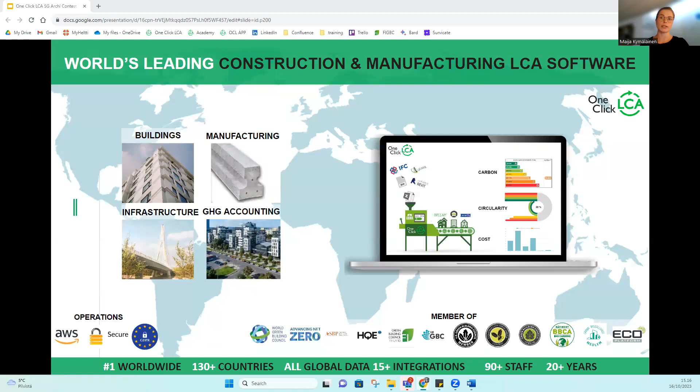We aim to connect the entire industry from engineers to architects, manufacturers, builders, investors, to institutions, to whom we provide a global platform for data and tools to make calculations in compliance to certification schemes and regulatory frameworks. One Click LCA is a global platform that supports over 60 different certifications and regulatory frameworks, and includes the world's largest data bank of construction materials with over 150,000 data sets.

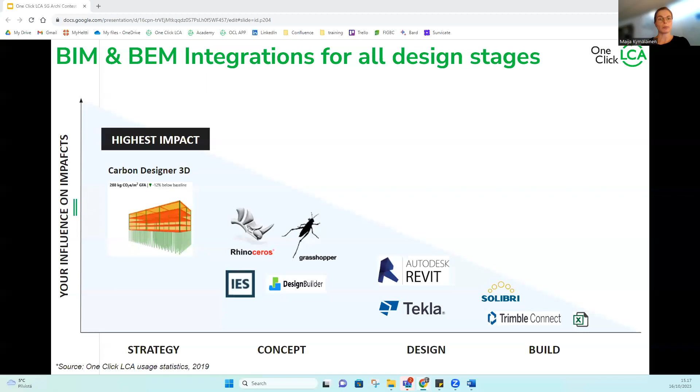We provide building information and building energy model integrations for all design stages. You can see some of our integrations shown here - maybe some of them you might have been using before.

Finally, One Click LCA provides free training for everyone interested. We provide reports, policy work, and research articles on meaningful matters. Lastly, we are a team of experts ready to support you in your journey to decarbonization.

Now we'll dive a bit deeper into today's agenda and continue with a look into climate change and the role of the construction industry.

The nationally determined goals, or NDCs, nationally determined contributions set under the Paris Agreement, are not even close to closing the gap to 2 degrees. But countries are off track to achieve even these globally insufficient NDCs. The current commitments by countries, as expressed in their unconditional and conditional NDCs for 2030, are estimated to reduce global emissions by 5 to 10% respectively compared to current policies, assuming full implementation.

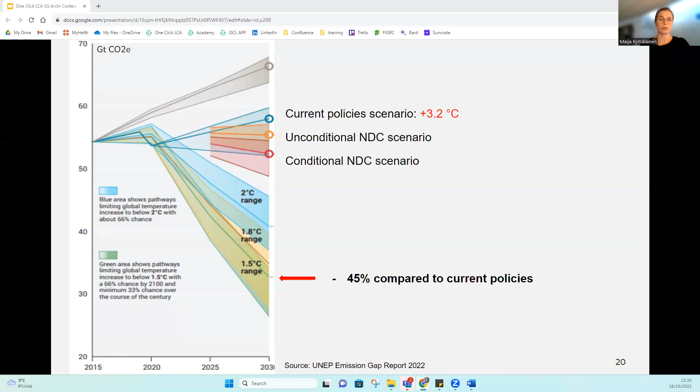To get on track for limiting global warming to below 2 degrees, and finally below 1.5 degrees, global greenhouse gas emissions must be reduced by 30 to 45% respectively compared with current policy projections. That is quite a big thing. Restricting global warming to 1.5 degrees requires approximately 35 gigatons of carbon dioxide equivalent of additional reduction measures. So this is no small feat.

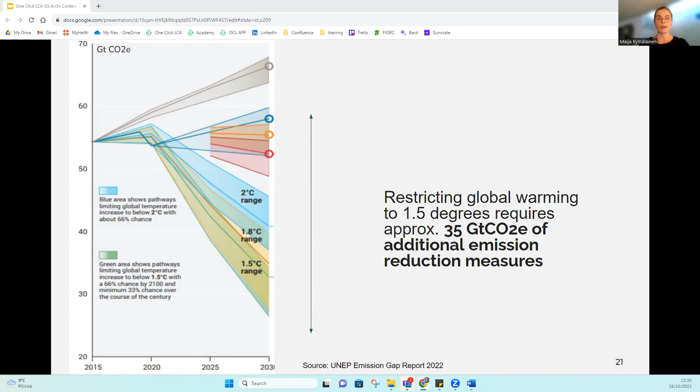In terms of the construction industry, buildings are responsible for nearly 40% of global carbon emissions. About three-quarters originate from operational emissions, while the remaining quarter is from materials and construction activities. This entails the embodied carbon we are going to talk about next.

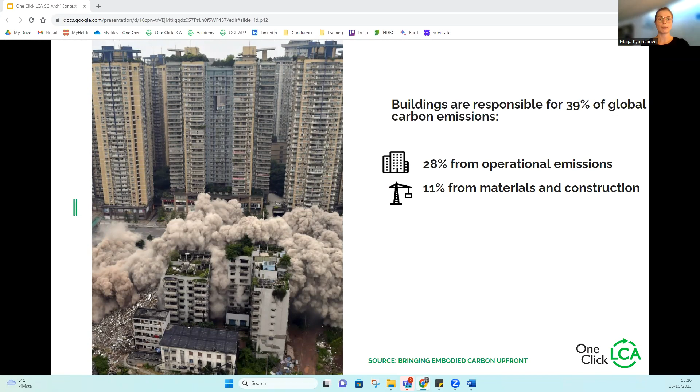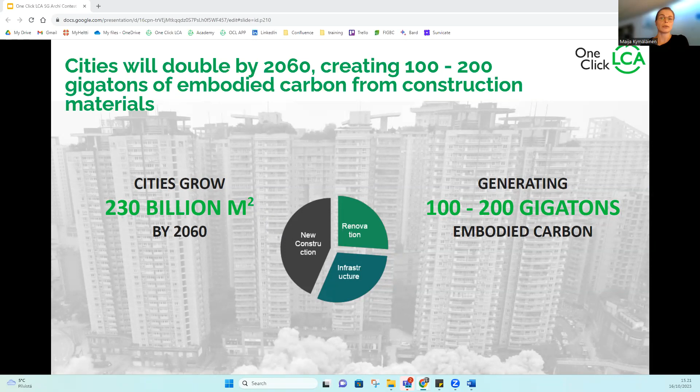Until 2060, the global population is expected to grow by nearly 3 billion people, and basically all of it is expected to happen in cities, meaning a huge amount of floor area needs to be built. It has been predicted that cities will double in the next 40 years, which will create up to 200 gigatons of embodied carbon from construction materials only. This means up to 3 years of global carbon emissions from materials alone, or in other words, building a New York City every month until 2060.

For this reason, the World Green Building Council has stated that we need to be cutting embodied carbon now. It follows that all construction needs to be operationally carbon neutral and create at least 40% less embodied carbon by 2030. So it is quite obvious that the construction industry needs to act fast.

Just a reminder: when we talk about embodied carbon, we mean the greenhouse gases embedded in the materials. These originate from material processing and manufacturing, transportation, the use of these materials, and the end-of-life processes as well.

If we look a bit closer at a building, we can see where the climate impacts mostly come from. This is an example building, a typical Finnish apartment building with 4 floors and a cellar, floor area of 3,000 square meters, assessed with the Finnish assessment methodology compliant with the EN 15978 standard, and calculated over 50 years of lifetime. These values are predominantly statistical averages from One Click LCA projects.

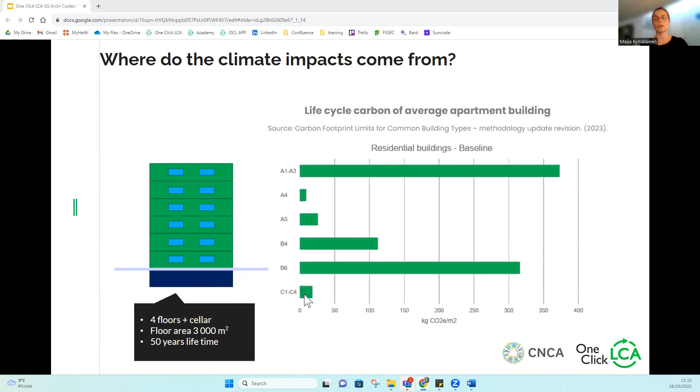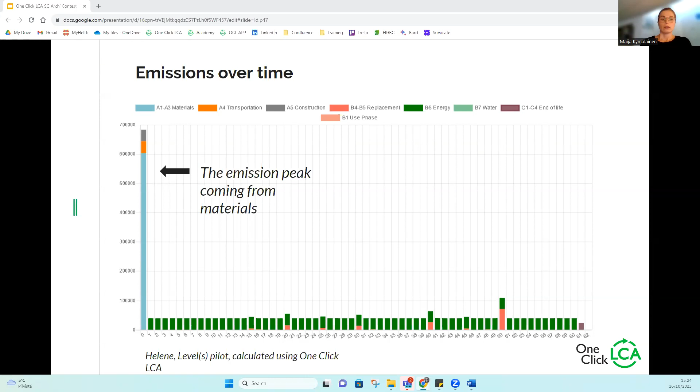We do know that the energy sector is actually decarbonizing. The share of renewable energy increases and fossil fuel use decreases, so the emissions from the energy sector are going to become smaller as time proceeds. But the emission peak coming from the materials remains unchanged.

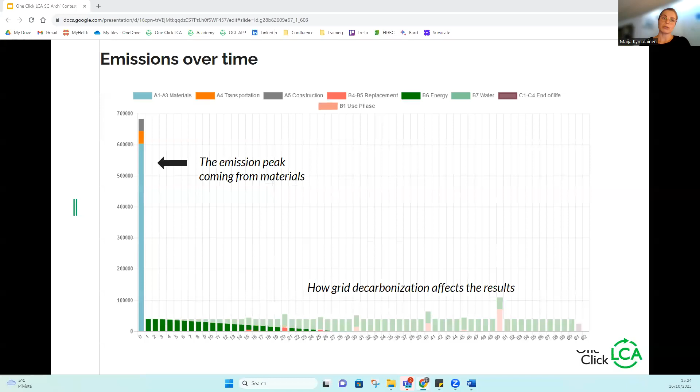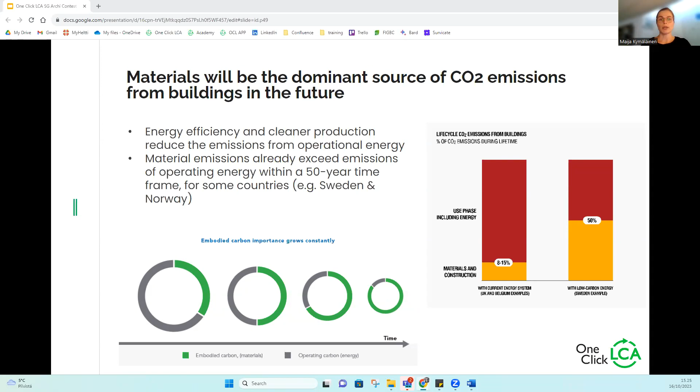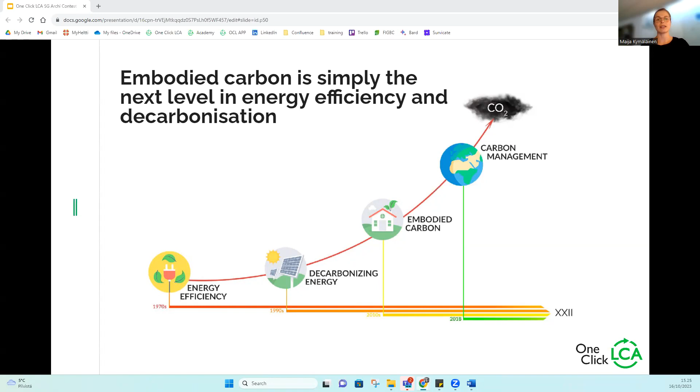So, for example, in Norway, where practically all electricity is generated by renewables, it would be hydro energy. So on the journey to holistic carbon management, embodied carbon is simply the next level in decarbonization.

And although we are getting ourselves deeper and deeper into the whole global warming mess, there is also an ever increasing demand for carbon neutrality in the market, and the need to make changes also in the building sector is getting ever clearer. So in that sense, we're in a lucky situation as LCAs and embodied carbon management is becoming a norm and therefore required by businesses, regulation, and certifications.

So just being less bad no longer cuts it in the market. You need to actually be making changes. As of now, there are over 100 certification schemes and regulations that drive the life cycle impacts of construction projects and materials. So building LCAs, climate declarations, material documentation is being required by customers, investors, and also nations worldwide.

That was our look into climate change and construction. And next, we move on to talk about what exactly is LCA and how you can begin to implement it.

So LCA, or life cycle assessment, is a holistic approach to environmental impacts of a project. It avoids shifting of burdens from one life cycle stage to another by addressing all stages, and provides the results in a way that makes it easier to implement desired changes to products, processes, and services.

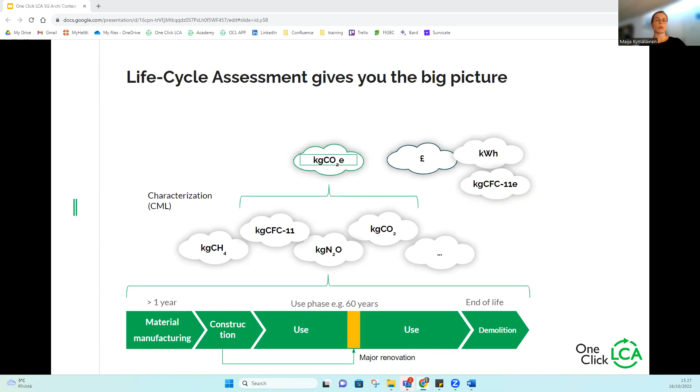We would use a factor derived from the IPCC characterization model, which is then applied to convert the life cycle inventory results to the common unit of kilograms of CO2 equivalent, for the characterization factor of global warming potential in the impact category of climate change. So here, the process can be done for materials or processes only, for life cycle stages, or for the whole life cycle of a building, such as here.

And a bit more detail here. So each indicator, the LCA outputs, are environmental indicators, and each indicator describes a particular category of environmental impacts. The impacts are expressed as quantities of matter that has potential to cause such impacts, but they do not represent the actual harm, which would then be the endpoint result.

For instance, global warming potential represents the amount of CO2 equivalent gases released, but the final impact might be, for example, the acceleration of polar melt. So here are some of the basic, or the most common, indicators used. Global warming potential describes how much a product contributes to climate change. So when LCA concerns only this impact category, it's also called the carbon footprint.

Other indicators include, for example, acidification potential, which describes how much a product acidifies the environment, which may result, for example, in acid rain. The eutrophication potential describes the flow of nutrients to ecosystems, for example to water bodies, resulting, for example, in algae growth that then depletes the oxygen in bodies and causes deaths of animals.

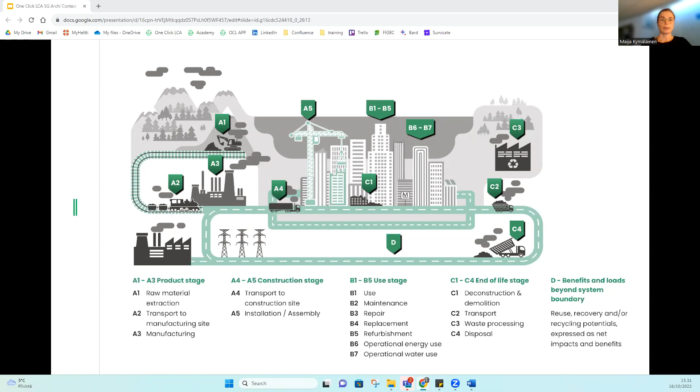If we look at it in a bit more detail, this is a more common representation of a building's life cycle stages according to the EN 15978 standard. Here you can see the same stages and modules as in the previous slide.

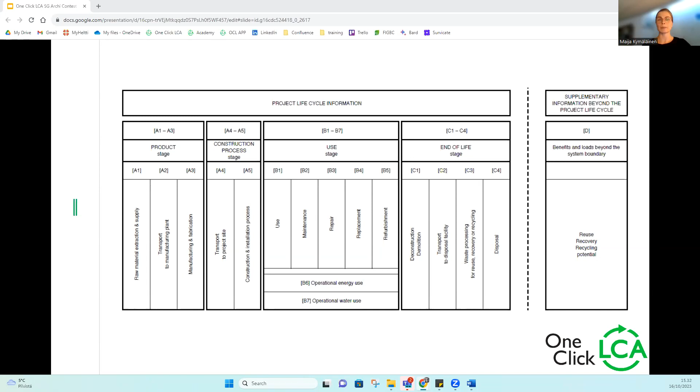From A1 to C4, and also module D separated here. It's quite important to notice that module D is always supplementary information beyond the project lifecycle, and its benefits are basically never deducted from the actual impacts, so they are only declared separately.

So current regulations usually focus on this part, operational energy use. This is regulated all over the globe. For example, in the EU, we've got the energy performance directives guiding us.

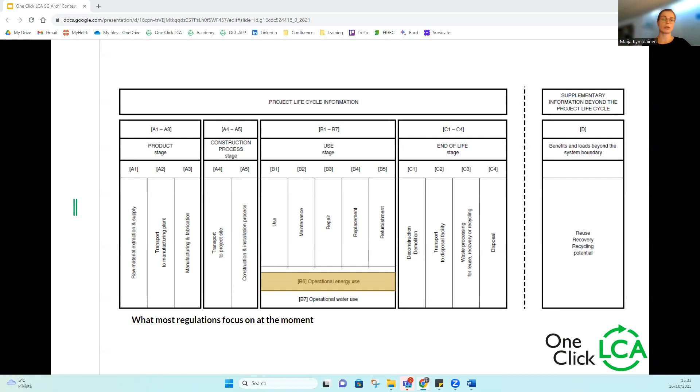But if we go to the actual materials, we've got other assessment types. For example, the assessment that only considers the initial material impacts is what we call a cradle-to-gate assessment. If we add transportation and construction impacts, we would then have a cradle-to-practical-completion assessment. And when considering also the use and end-of-life impacts, we would have the cradle-to-grave assessment. This is the most typical approach for a building LCA.

If we bring in module D, we can call this a cradle-to-cradle approach, and this is where circular economy comes in, because we are taking into account also the reuse and recycling and so on for the materials. Nowadays we're aiming for these kinds of assessments because we want to increase circularity within the construction sector. And also the product LCA should now report module D for declaring the recycling benefits and loads as well.

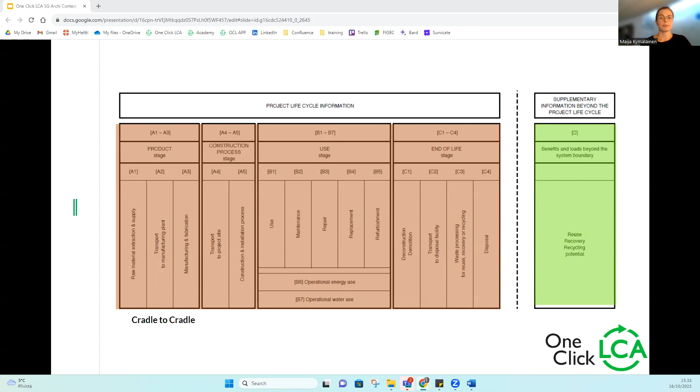If we leave out the operational impacts, we would have an embodied carbon assessment. So this would be only the materials.

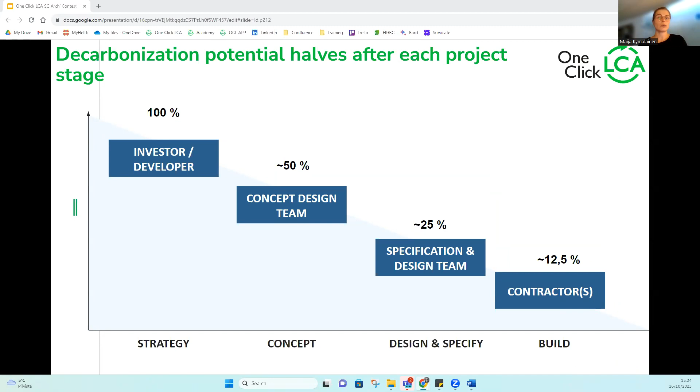So what is the appropriate time to conduct an LCA assessment? The answer is sooner the better, as the decarbonization potential actually halves after each project stage. So you need to start working on it early on. Changing the project direction becomes increasingly difficult and costly as the project progresses. This limits decarbonization potential as well as the ability to influence specifications. Cost increases as the ability to influence emissions decreases.

Then let's go into EPDs. So what exactly is an EPD? For LCA, we know that data is key and you need the data to be reliable. So what you would most often turn to is an EPD, or environmental product declaration. An EPD is a document that basically holds the life cycle assessment for a set material or product.

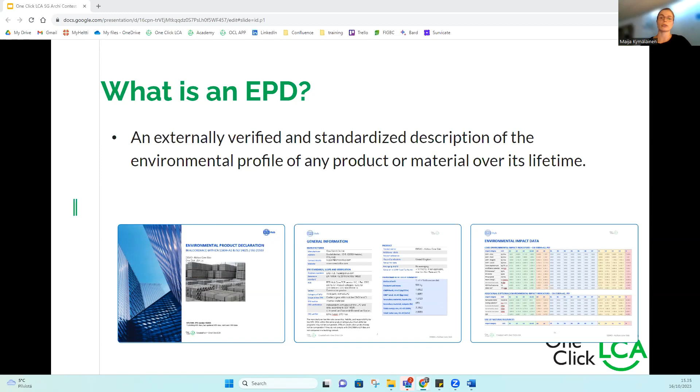EPDs are externally verified and standardized descriptions of the environmental profile of any product or material over its lifetime. It helps to transparently communicate the product's environmental impact, providing a summary of cradle-to-grave emissions. EPDs are also type 3 environmental labels based on international ISO and European EN standards.

So why are EPDs useful? Well, they are objective, basically based on internationally accepted standards and validated LCA methods. They are credible and neutral. EPDs are critically reviewed, approved, and maintained by independent third-party verifiers, and they do not make environmental preference claims.

EPDs are open, so they are free for everybody. They are applicable also to a wide range of products and services and can be easily accessed.

EPDs are environmental impact oriented. So while an EPD doesn't necessarily mean the product is good or bad for the environment, it does assess the potential environmental impacts, and having that information is required to make an LCA for a building.

EPDs are also instructive, so they give general information as well as explain terms, definitions, and LCA concepts, and they help to interpret that information.

So in a nutshell, EPDs are based on real data. There is no forecasting of future impacts. They can represent either one product and one factory, or many products and many factories. They are often valid for 5 years.

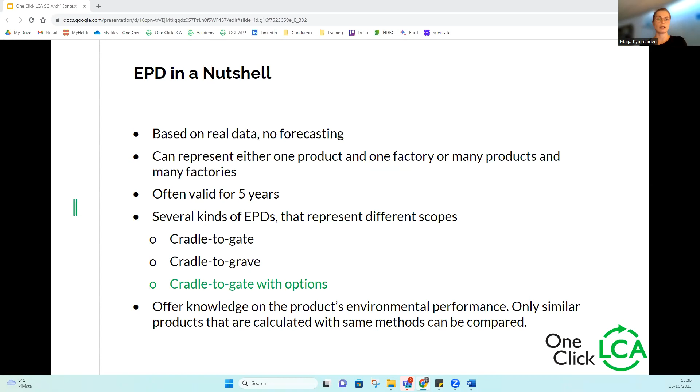And this is what it would look like on the inside. So the report basically shows environmental impacts for each life cycle stage and module on chosen impact categories. So here you can see the stages, so product stage, construction stage, use stage, and so on, and also separated by modules. Here you can see the chosen impact categories. So we got global warming potential, ozone depletion, acidification potential, and so on. And it's also instructive, so it tells us what it is actually measuring.

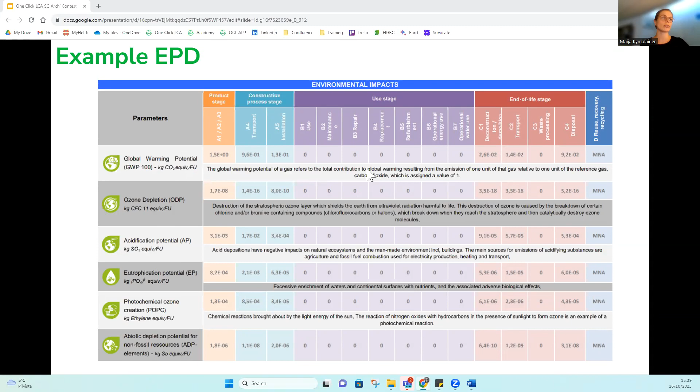Then we'll continue with a quick look into legislation and standards. So LCA follows standards. That's what we covered so far. So it is a standardized method to assess the environmental impacts. So the cornerstone standards for LCA are the ISO 14000 family. So we got ISO 14040 and ISO 14044. So these are the standards for the fundamentals for LCA. So they are used in all industries and in professional context almost all the time.

Based on these, we have the construction works specific standard. So the EN 15978 that was mentioned a couple of times. So this is the LCA standard for construction projects. And also the international version, the ISO 21929, and also the ISO 21931. But these are not used in Europe usually. But if you are located outside Europe, these would be the standards your LCA is made according to.

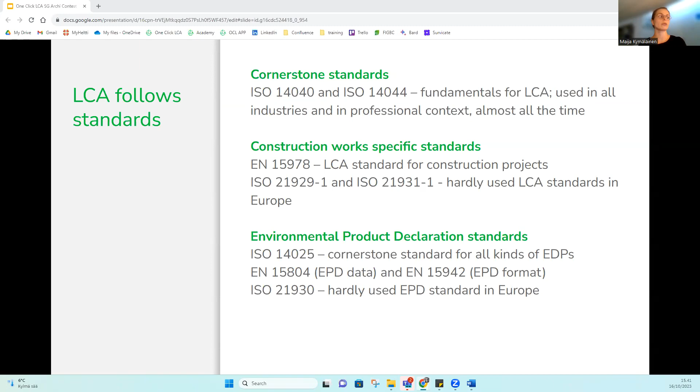And then we have also the Environmental Product Declaration, or EPD, standards. So there's the international ISO 14025, which is the cornerstone standard for all kinds of EPDs. And then the EN 15804 and the EN 15942, which are for the EPD data and EPD format in Europe. And then there's also the ISO 21930, which is hardly used in Europe. But again, if you are located outside Europe, this would be your EPD standard.

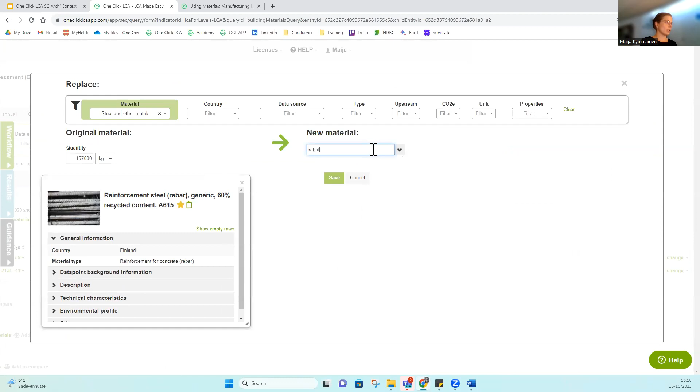And so, if you remember, my steel had 60% recycled content, and I would like to reduce the impacts by replacing it with something else. So with the replace function, you don't need to type in any units or material quantities, but you can just replace what you have. So I want to add reinforcement. So this is what we are using now, but I want to use this one. So it has 97% recycled content for the same strength.

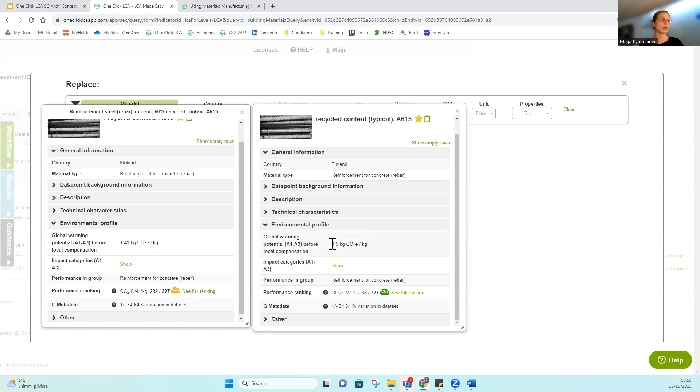If you want to compare them a bit more closely, you can check the environmental profile, for example. So here we can see that the old one is 1.4 kilos of CO2 equivalent per kilo, but here we only have 0.5 kilos. So it's a better option. I will click save. And now we can actually see that our impacts are decreasing a little bit.

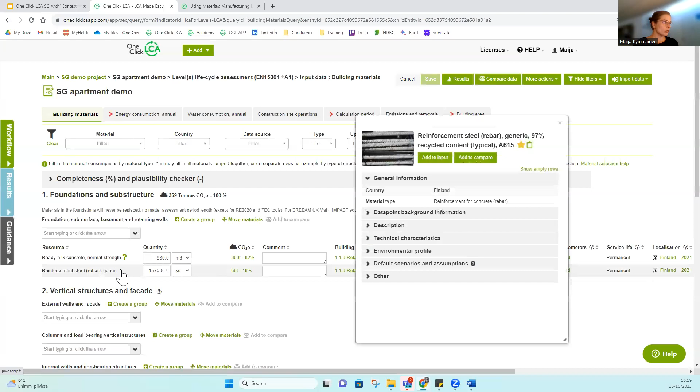Yeah, one more thing, from this green question mark, you can always get the data card open. So here you can get a bit more detailed information on the actual material, the description, how it was made, some technical characteristics, environmental profile. So this is useful for the comparison. And then default scenarios and assumptions and so on. And this is something that you can also do from here. So if you are interested in this reinforcement steel, for example, you might want to open several of these side by side, and you can just check which one is best suited for your uses.

Yeah, but now as I noted that time is getting closer to finishing, I will actually show you how to do the import process and how we can actually get more data in here. So you can do it like this, that you just add row by row. But first save. What you probably have is some material information in another form. So if we go back to the main page, you can see that there's no results because we have missing mandatory information.

But what we will do now is we will import material information from Excel. So like I said, there are several ways to import material information. So you can use these integrations.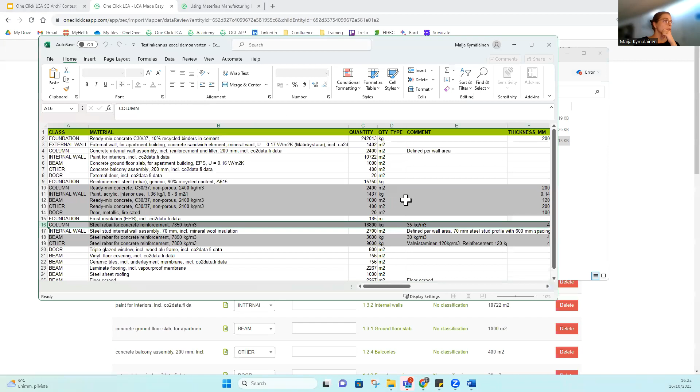Oh, I could actually show you what the Excel would look like. So a little bit about the naming. So this is my Excel that I'm bringing in. So yeah, this is what it looks like. So there's a class, there's the material, the quantity type, comments, thicknesses, and then transport distances, these kind of organization-specific classifications and waste and so on.

The most important parts are the class and the material. So the class was how we did the classification. So these are the One Click LCA classes, so foundation, external wall, column, beam, and so on. And the material name. So for material name, you want to be specific, but not too specific. So if it's too general, you might not get a hit. So it probably won't map it correctly, or if it's too specific, the same thing happens as well.

Leave out like colors and such, you don't need those. But what you would need, for example, for concrete, it's valuable to know that it's ready mix, we have the grade, and we have the amount of recycled binders, for example. And the quantity type here.

The comments are pretty good when you're bringing in data. So if it doesn't recognize the data or map it properly, you can write it in the comments and get it visible after the import process, so you can remember what materials you were working with. There's also quite a lot of these. So for example, transport distance YM is specific for the Finnish tool, and there's also other parts here that you can just leave out. But these are the most important parts that you need to consider.

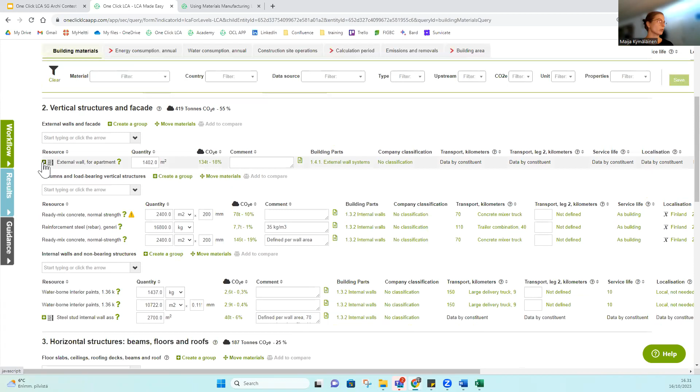Okay, so it takes us directly to the results, but we will go back to building materials. So from this input data part, you can click and go into different sections. So everything that we imported is here now. There are also some constructions. So for example, external wall is a construction that includes different data points calculated beneath one group. Here is our undefined material. So this was the floor screed, and I want to replace it with something else.

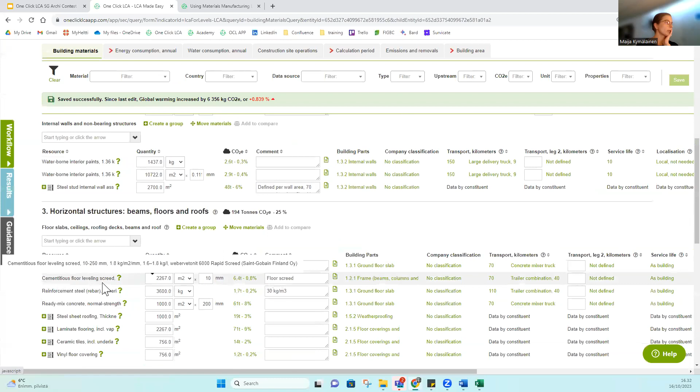So I need to go to change, and I will replace it. So if you use the replace function, you don't have to type in any numbers, but you can just replace it with the material, the quantities remaining the same. So it is a leveling screed for floors, and I want to use this Weber floor screed to replace it. So I will choose that one. It shows me what it is, and I'm happy with it. So I will click save. So this is how you would deal with materials that are undefined. So yeah, now I have it here. Great.

Okay, a bit more about the materials. So if you want to add in something more, you can also use the filters. So here you can get the different categories. And as I mentioned, constructions. So for example, here the external wall or apartment construction. If you want to add these kind of ready-made constructions, you can also go here. Filter by country, so for example, for Finland. You can also choose data sources if you wish, the type, if you want a generic or manufacturer EPD, for example, upstream data banks. So you have Ecoinvent and GaBi, for example, not that useful maybe for this building LCA, but for material comparison could be.

And then if you want to set the carbon intensity, also units or different properties. So if you, for example, want 100% recycled concrete or something like that. But I want these two. And let's see if I can add a foundation construction instead.

Foundation construction. So here I want to replace my concrete and rebar with a plinth and footing foundation for a ventilated base floor, for example, with reinforced concrete piling up to 10 meters of depth. So I will add this.

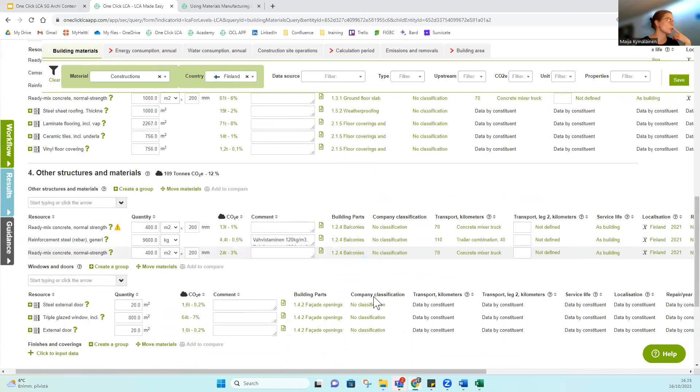So for example, windows in our project are reused, as well as the doors. They are brought in from another construction site, for example, so they are leftover material, considered as reused. So I will click on those.

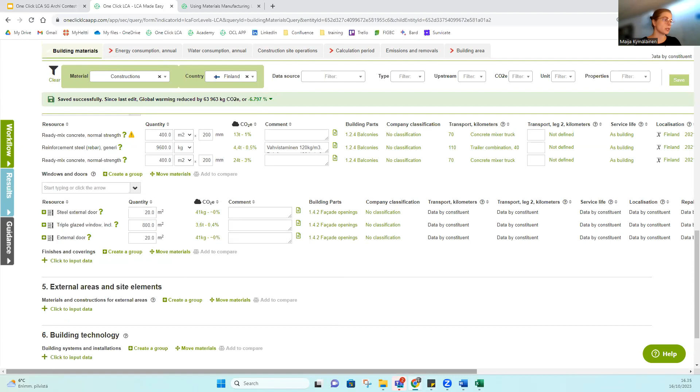If I then click on save, it should also reduce the impact a little bit at least. All right, so we got almost -7%. So this means that we are saving on the product stage.

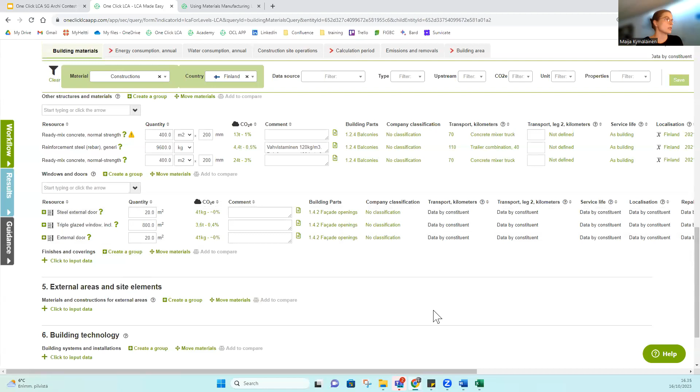Emissions, so we don't have to calculate those because they are already calculated for that other project. Here we are only accounting for the transport, installation, use, and then the end of life. So this reduces some of our impacts.

But yeah, let's move on to energy consumption. So I believe that for your projects, you need to calculate electricity or energy use overall. But once you have calculated them, you can just input the energy here.

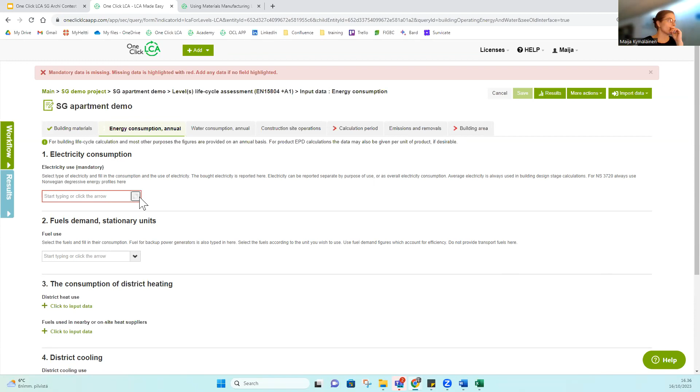As electricity, district heat, for example, and so on. You can just input these here. You can find what kind of electricity you are using. So, for example, we were using this kind of Statistics Finland electricity here, so we can just choose that one. There are also several other options.

For this sized building, this might be an accurate number. Profile, yep, so this is okay. You can also specify the use if you want, but here I will just put overall.

Fuels, if you have, for example, oil heating or something like that, you might want to put it here. But in Finland, in the cities, district heating is what you would probably go for. So, for example, in Viikki, this is what you would choose for a new building, this district heat. Or ground heat is also the other option, ground source heat pump. But we are using here district heat.

And also, again, we can choose, for example, an average district heat. There are several local options as well. We are going with the average, and for this size, it could be, for example, 90,000. Profile and usage also, so you can choose where it's going. District cooling is becoming more important also in Finland, so you might want to add something here.

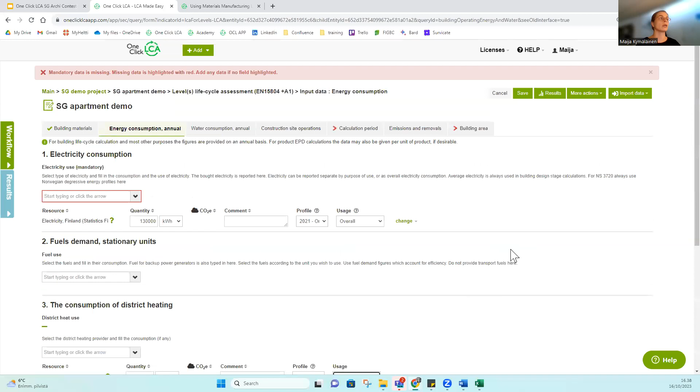And also exported energy, so if your building has, for example, solar panels on the roof, you have some leftover energy that is fed into the grid, you would put it here, and this would show in your D module. But now we are happy with our electricity and heating. Click save.

And then we go into water consumption. This is another annual query, so you would put an annual consumed water here. So here you have tap water, for example, conventionally treated. We might add this one, for example, as cubic meters. Let's say we are using, I don't know, 2,000 cubic meters.

And then when you're moving along these query tabs, it also saves your results without you having to press save. So then the construction site operations.

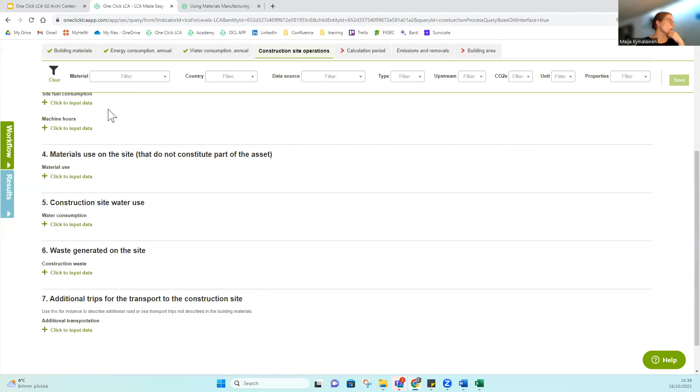This information is something that you would get from the company who is actually doing the construction operations. So they would provide you with data from electricity used for lighting, for example, machinery, and also the fuels for machinery, like excavators and so on, and also the waste created. So you would put them here in their dedicated sections.

But since we are doing an early stage assessment, we can also use scenarios. This is made from average data that's common for that geographical region. So for example, in Finland, we have several different, so we have machine operation and other site operation.

So there's average construction site impacts in the Nordics per gross floor area. You can choose to do it with 100% biodiesel, for example, but we are just going with this one. And you would put the square meters of building as the quantity.

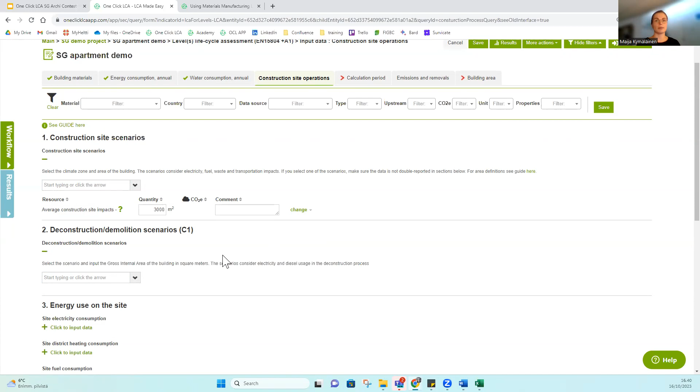And the same applies for the deconstruction. But for deconstruction, you of course don't have any data available until the building is actually deconstructed. So for this, you can only use scenarios. And in Finland, we have different data points for different types of buildings. So we would here choose the residential building and again input the number for the area.

And then we continue to the calculation period. This is important because often the results are given per year, so per square meter per year. And when you're using levels, you would put here 50 years.

Then the emissions and removals. So the emissions are basically only refrigerant emissions, so leakages. When you're using AC equipment, you would have a cooling agent, and those cooling agents always have some sort of leak, specified by the material or chemical you're using in your devices. So here you could choose what to put in, and also the total, like the percentage per year, is given with the data point.

You also have the emissions, the removals. So you have carbonation of cementitious materials and also vegetation carbon withdrawals that you can get in your D module. So carbonation is something that happens to cementitious materials as they absorb carbon dioxide from the surrounding environment. It's like a reverse of the calcination process that happens in cement production. This depends on the total volume of these cement materials.

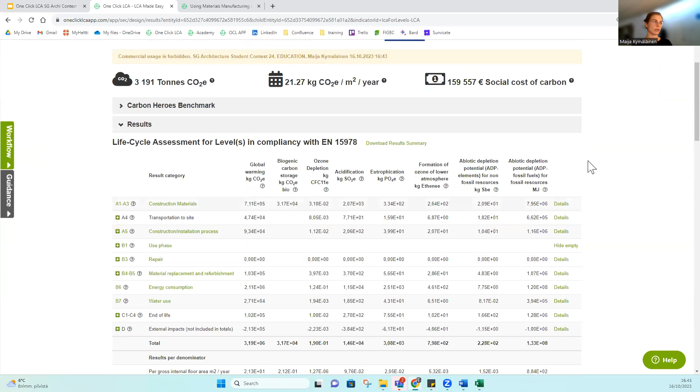Go to results. And here we have our results. So now it's giving us these as scientific numbers, the E is for exponent, but you can always change it here. So I will go with decimal numbers just for clarity.

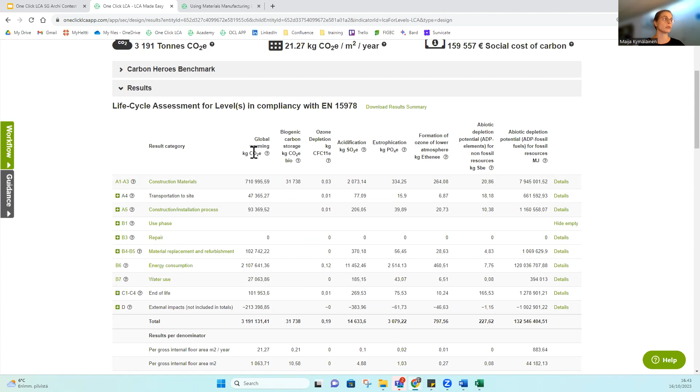So it gives us the results per stage and module, and per impact category. So here we have the global warming potential per kilos of CO2 equivalent for the construction materials, transportation, and so on, and then total and also per denominator, so per gross internal floor area per year, and also per gross internal floor area square meters for the whole life cycle. And also the different indicators here, so biogenic carbon storage, this is for wooden materials mostly. Ozone depletion potential, acidification, eutrophication, and so on.

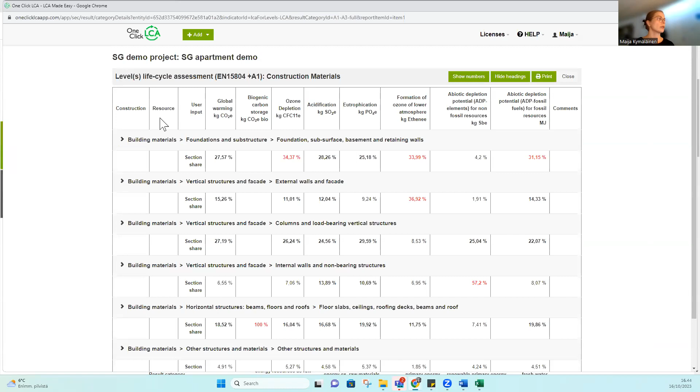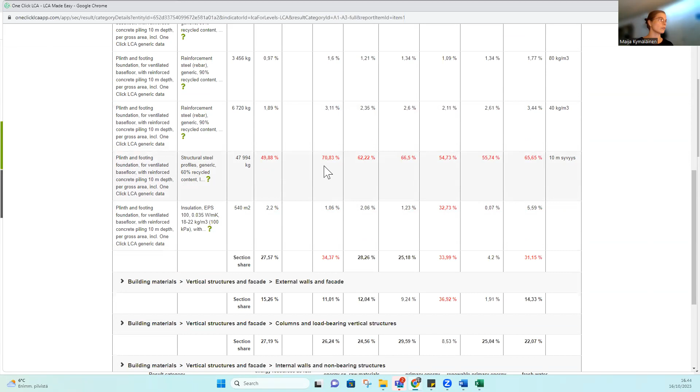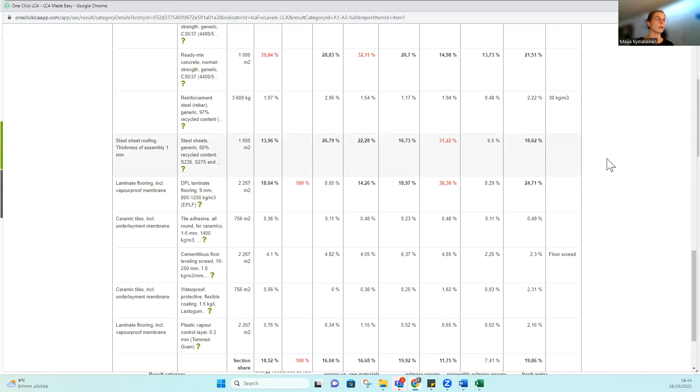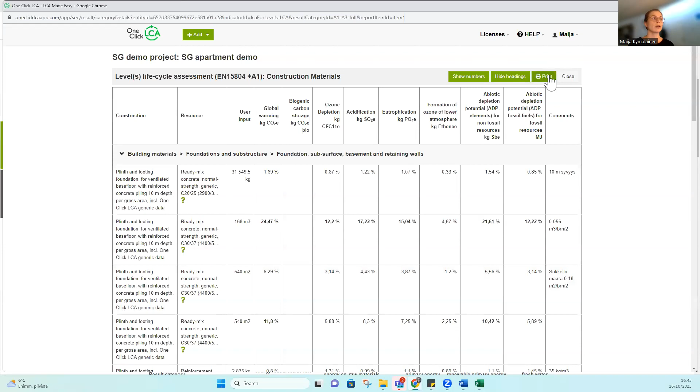From the details, you can always check. So this is for A1 to A3, you can see your building materials, and it will then highlight the biggest impacts. So yeah, like foundations is usually what you would see here. Foundations are quite carbon intensive structures, and horizontal structures is another one. So you would see here flagged in red the materials and what kind of percentage share they form of your overall impacts. So here you can also show numbers in more detail, print these, or you can close it.

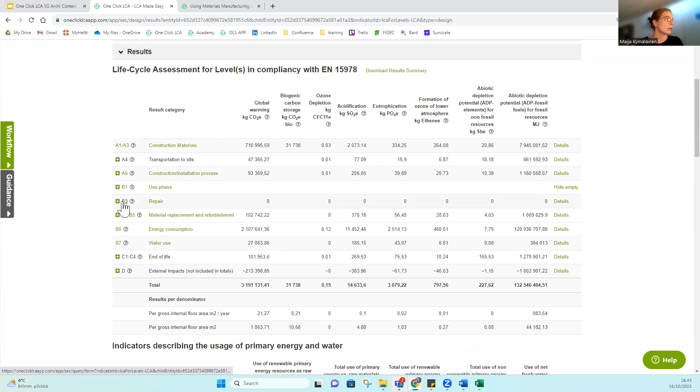And you can also click here, for example transportation, you can see the different parts. So this is transport to building site and also leg 2, which we didn't have. You can click B4, B5, and it will give you more detailed information on it. And for all these, you can export the used EPDs, you can change the result formatting, you can print the results, you can get a results report as Word for example, or send data to another user.

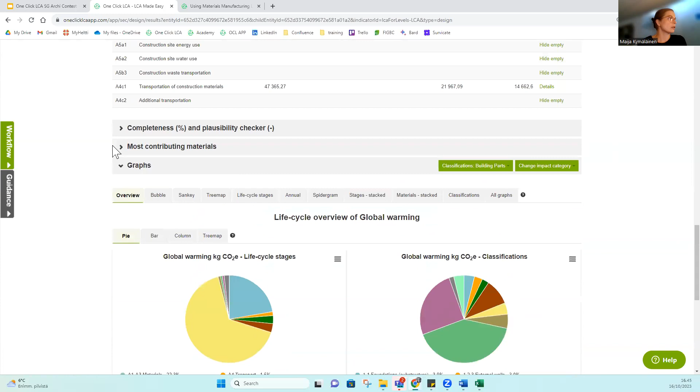And then you get indicators describing the use of primary energy and water for the same life cycle stages and modules, with much more detailed information, and also the site impacts. And then beneath you have the completeness and plausibility checker.

So this lets you know if the analysis has been made according to rules. Here it says mandatory elements are missing - we are missing load-bearing structural frame, other systems. We didn't have building technology, for example. It asks us to check if we have or are going to include these elements.

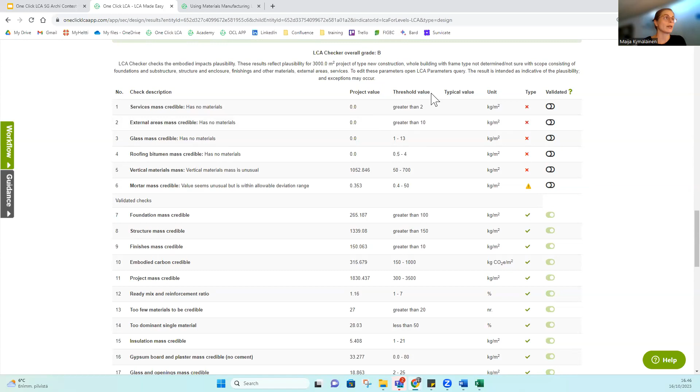But overall we have a grade B, based on the data we've provided. It has threshold values and compares the parts we're putting in to the threshold value, giving us a valid or invalid answer.

For example, I didn't have any roofing bitumen, so it has no mass. The threshold value is here, but since we had a steel roof, we didn't really need any roofing bitumen, so we could just click this and it would be validated. Foundation mass is credible, and so on.

So these are something you might want to check. They don't influence the calculations, but are more for your own information.

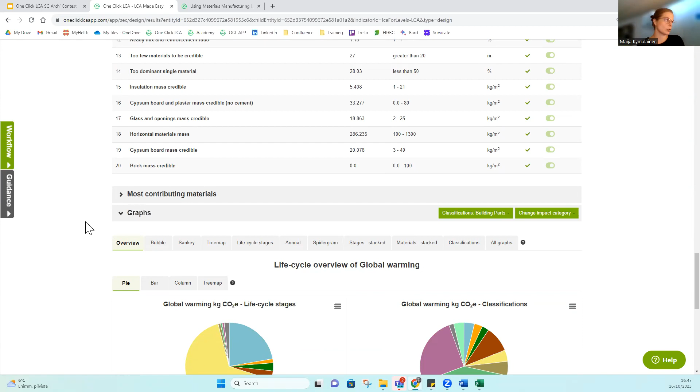Then you can click on the most contributing materials. Here it will list, based on A1 to A3 impacts, the most influential materials. For us it's the ready-mix concrete because there is so much of it - it forms 28% of our cradle-to-gate impacts. We can also search here for sustainable alternatives that might help us optimize the results.

So this is something you might want to check. Again, with the question marks you get the data cards, and you can also see the full ranking of all these materials in certain categories, and add to compare certain materials.

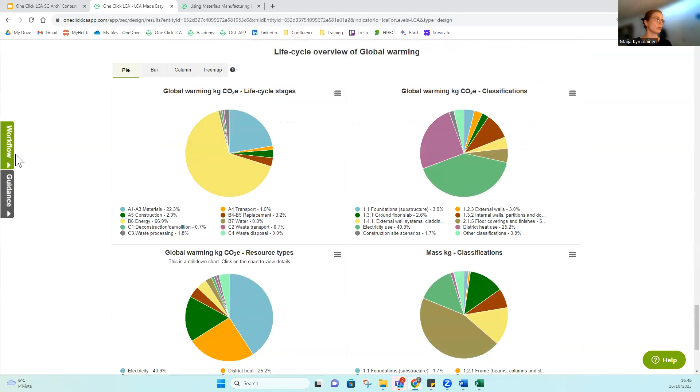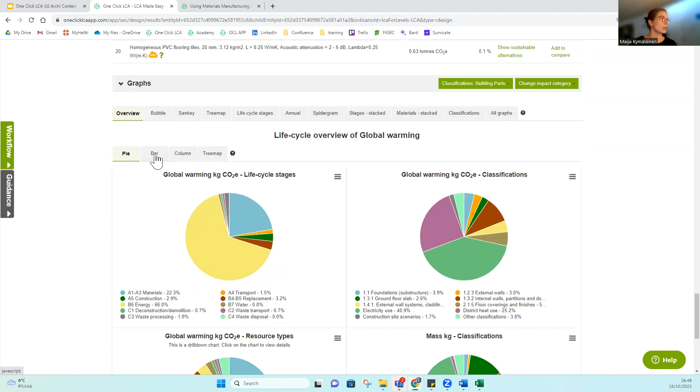And then in the end it shows us the graphs. So a lot of information, and all of these can also be downloaded as images, or you can download only the information behind it to make your own graphs. You can get pies, bars, columns, tree maps. For example, here you can see the global warming potential per life cycle stages, per classifications, the masses, and the resource types.

You can also continue further to see different kinds. So here we see what are the most contributing resource types in our building project - we got electricity and district heating, and also ready-mix concrete.

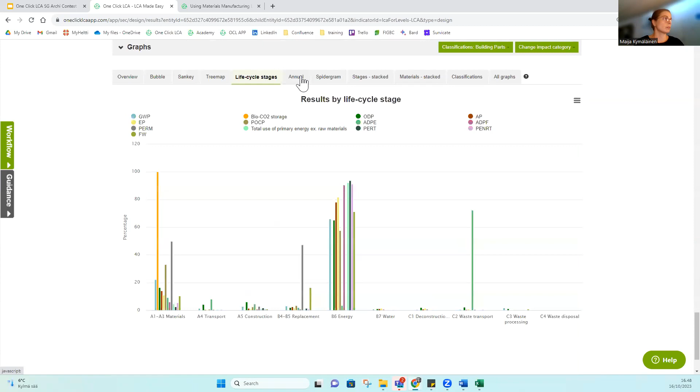And these are just there to help you begin to optimize. So you can look at this - you get all these different kinds of graphs, so you'll find something that works for you. For me it will be the bubbles, because these are very informative in my opinion.

All right, so this was our quick look into the interface. So now we go back to the main page here.

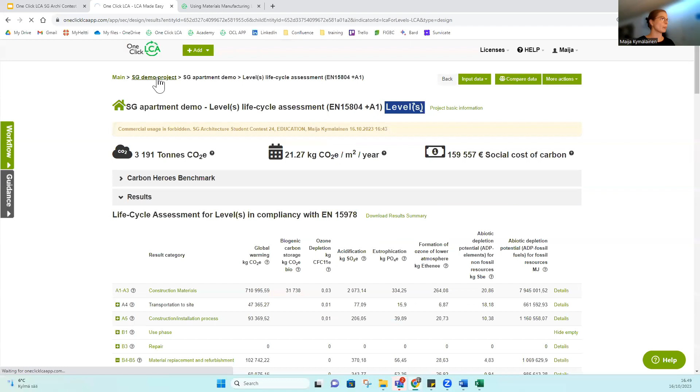Here it will also give us information. You can click on the general information to remind you what we are doing - so this is our license, this is our address, what type, what size building.

We can see the results and benchmarking. So we have this Carbon Heroes benchmark, which, because we are in Finland, is comparing this to all similar kinds of projects made in Finland using One Click LCA. So our project is doing quite well, but this is because we are actually missing some materials - we didn't have those building services, for example, that are usually quite impactful.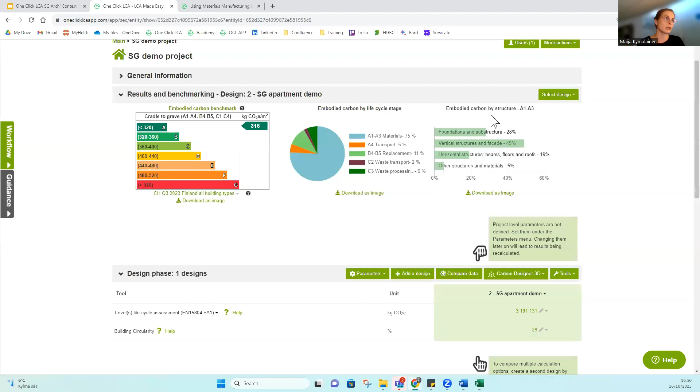There's the embodied carbon by life cycle stage, so here you can again see where the impacts come from - that would be materials, and also by structures. So vertical structures are, in this case, the biggest emitter.

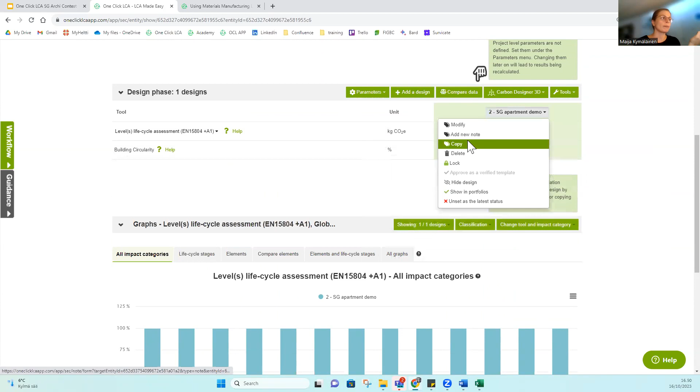Then we got 10 minutes left. So yeah, first, if you would add a design here, you could maybe copy this and create another one and then start optimizing.

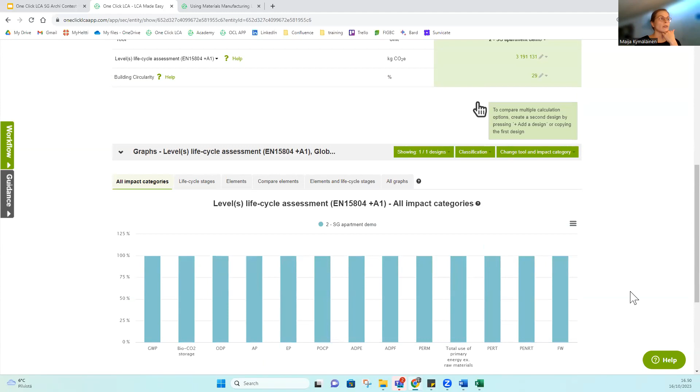But we'll actually look at this on Thursday. If you do that, you would get different kinds of results here, and then you can see which is the best one in terms of the chosen impact category, for example - but we'll look at that closer on Thursday.

But I will quickly take you through the building circularity tool. So here we go in the building materials input - this is the same, it looks a bit like the material query in the actual tool.

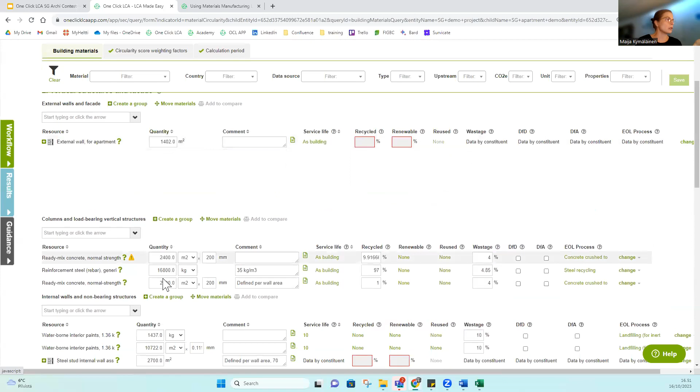But here you get to choose, for example, external walls for apartment. You get to choose if there is recycled content, and you can alter or update these values. If it's reused, for example, we could say our steel could be recycled or something - this is also related to the actual data points. So here we have 97% recycled, but if it's reused, we could also put a share here.

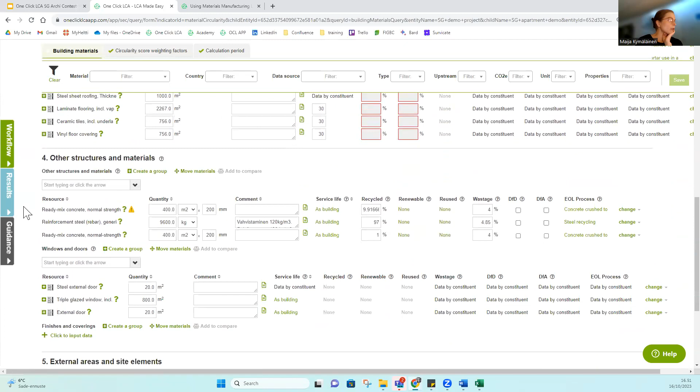We had those windows, for example. Let's see if they are reused, because we chose to reuse them. So we put here, it's 100% reused. Also, our doors were 100% reused.

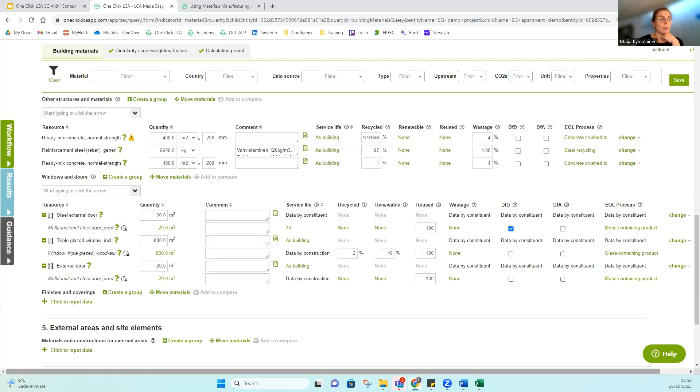You can also define the wastage, the design for disassembly here. So for example, a door could be easily designed for disassembly or designed for adaptability. This is something we will discuss closer on Thursday. But we can now save, and let's see what our results will look like.

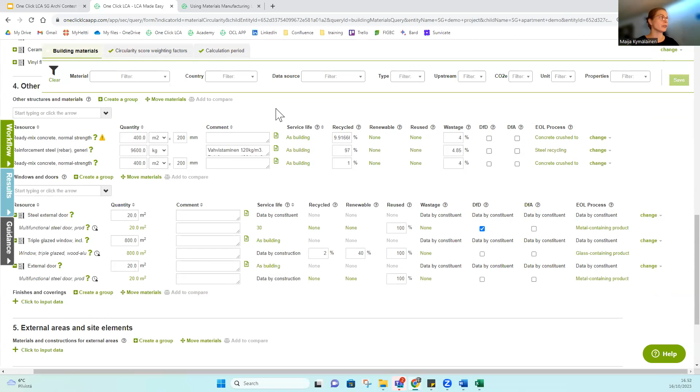Next query tab would be circularity score weighting factors, but this is probably something you don't need to alter. So these are defined: for virgin materials, the circularity would be 0, because virgin materials get no circularity points. Then we had our calculation period, which was set for 50 years.

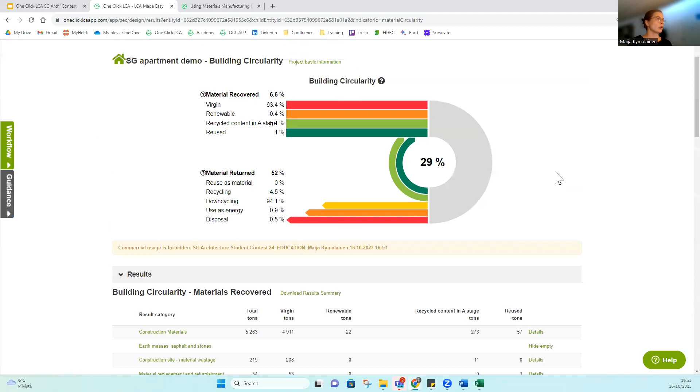If we check the results, we can see the building circularity score of our building. It shows us the share of virgin materials, which get no scores. So 29% is the share of renewable, recycled, and reused materials, and also materials that are reused, recycled, used as energy. Maybe downcycled materials are not calculated in this one.

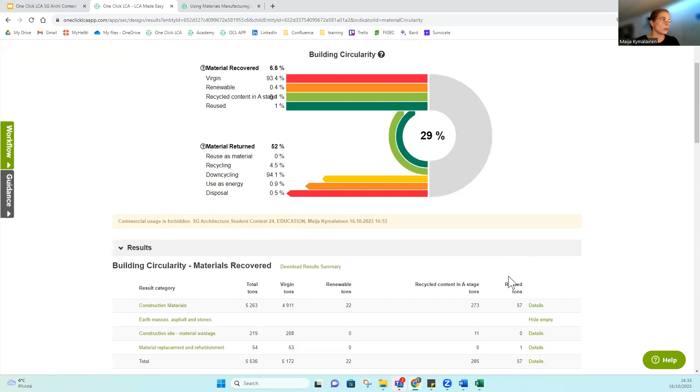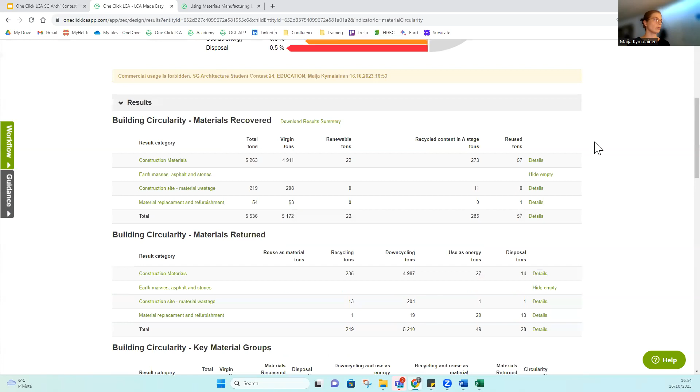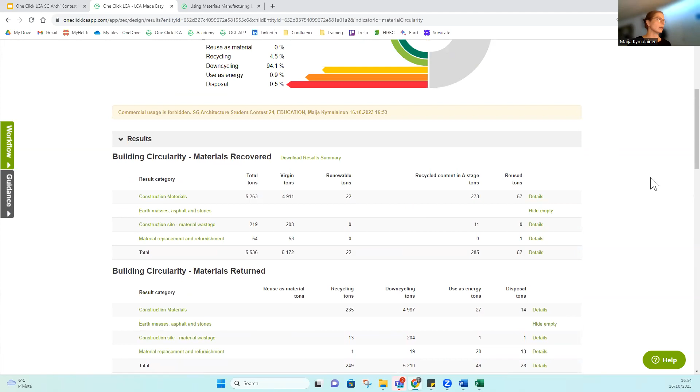So this is something you might want to check if you aim to reuse as many items as possible, so you can get this circularity index and maybe take a closer look into what, for example, can be reused and recycled, and how design for disassembly and adaptability would alter this score.

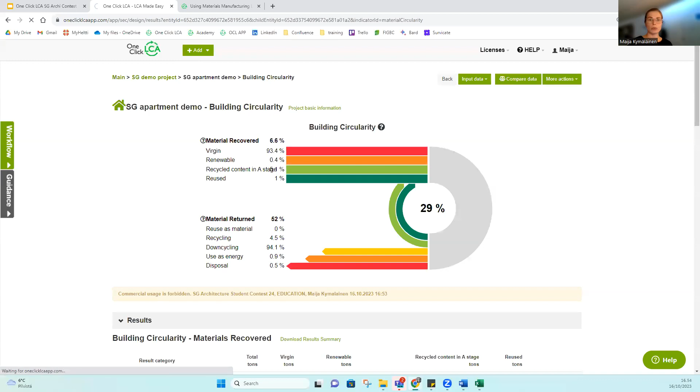But this concludes our demo. So I will now go back here.